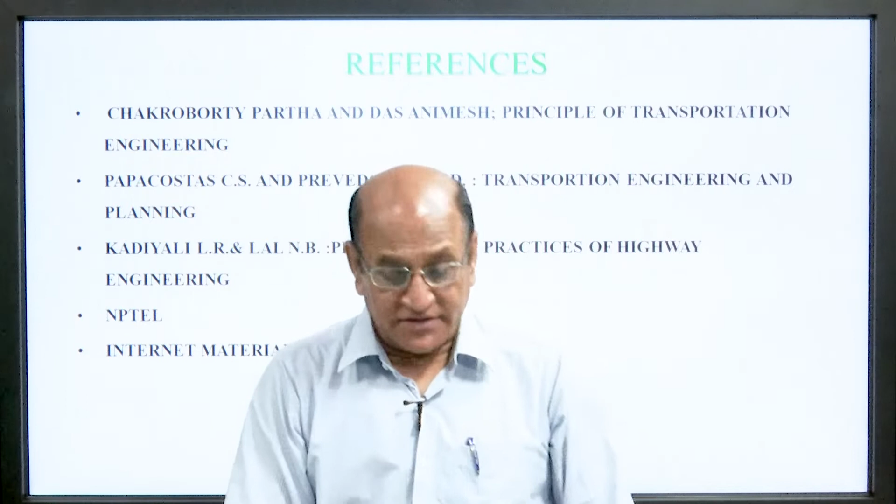The contents that I have taken are: transportation planning, component of transportation, travel forecast, transportation problem facing US cities, transportation problem, traffic management, long commute, parking issue, large fleet cost, a sprawling city.

Making public transportation attractive, bad traffic management, parking problem, fuel price, faulty planning and transport system, worn out and obsolete asset, improved technology.

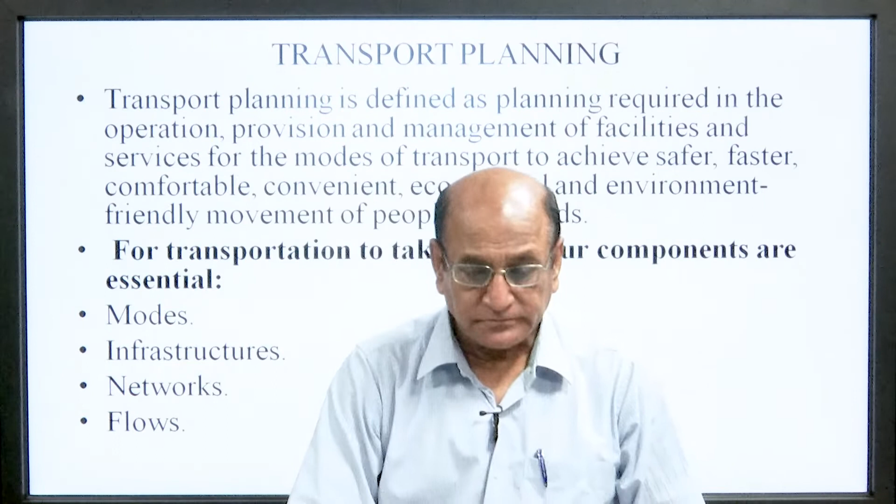Transportation planning is defined as the planning required in the operation, provision and management of facilities and services for the modes of transportation to achieve safer, faster, comfortable, convenient, economical and environmental friendly movement of people and goods.

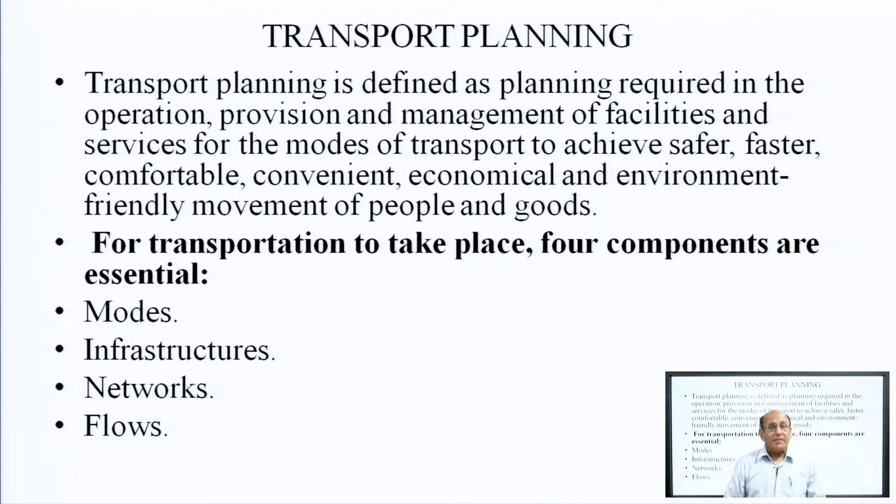For transportation to take place, four components are essential: modes, by which mode the passenger or goods are going; infrastructure, meaning road, bridge, metros, railway tracks, etc.; network, there should be a proper network; and flows, how traffic are flowing.

So components of transportation as given: the first is mode, in which aeroplane, then car, then rail, truck, etc. are shown here. Then infrastructure, that shows road, and networks, how roads are connected or different modes are connected with each other, and the flow, how the traffic flow is going on.

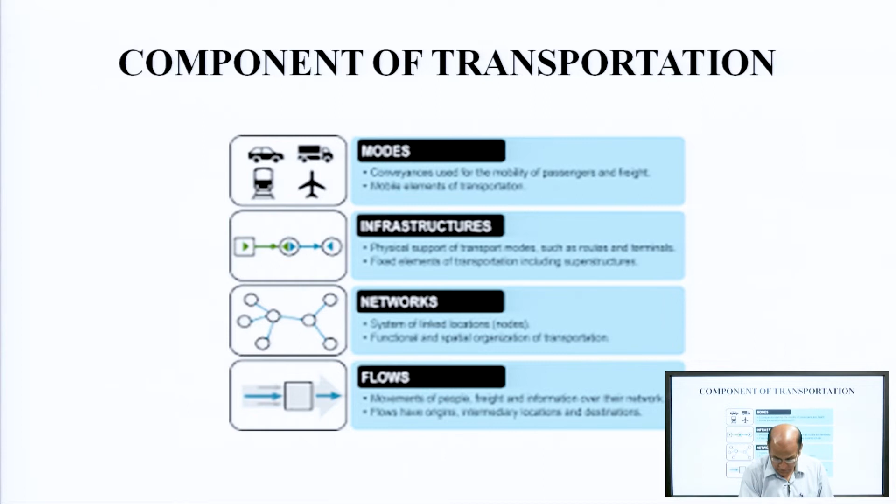Travel forecast. The 4-step travel model is a framework for determining transportation forecast, and those are trip generation, trip distribution, mode choice and route assignment.

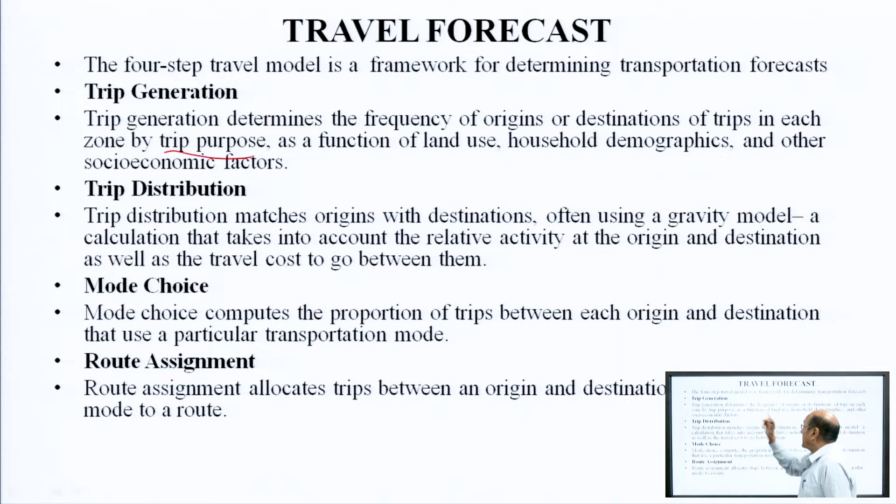So trip generation determines the frequency of origin and destination of the trip in each zone by trip purpose, as a function of land use, household, demography and other socio-economic factors.

Then the second step is trip distribution. Trip distribution matches origin with destination, often using a gravity model calculation that takes into account the relative activity at the origin and destination as well as the travel cost.

To go between them. Then the mode choice, by which mode the passenger or trip will be completed. The mode choice computes the proportion of trips between each origin and destination that use a particular transportation mode.

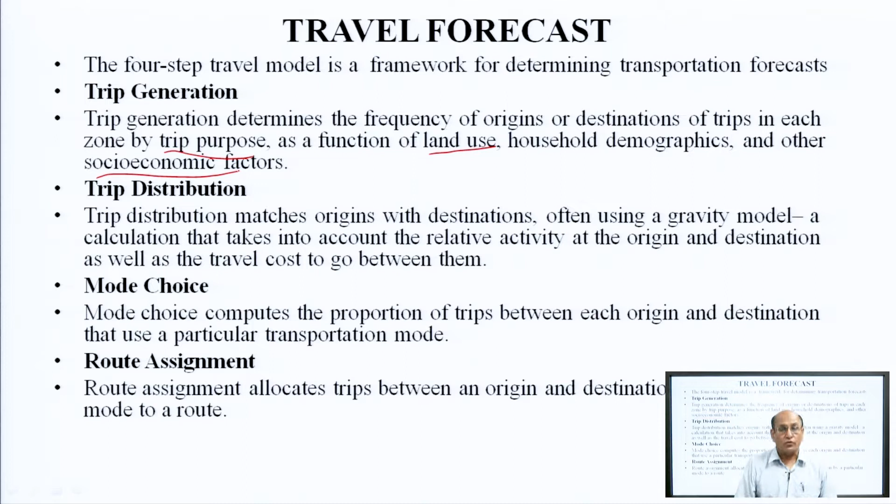Route assignment allocates trips between the origin and destination, by a particular mode, to a particular route. So this is a line diagram for the 4-step regional travel forecasting model.

You can see here, here is the highway and transit network. It is connected zone to zone. So each city is divided into different zones for the traffic or making trips.

Then it is connected based on the land use data, and after getting all these things, then the trip generation step will come into existence. The second is trip distribution.

As we think how a trip generates: suppose we have to purchase cloth, so we decide where to go, either Hazratganj, Aminabad, or some other place also - I have just given an example of Lucknow. So as we think, then the trip generation starts.

Then the trip distribution - here is the trip distribution in which trips are distributed to different sites. Then by which mode you will travel, that will be decided by the mode choice.

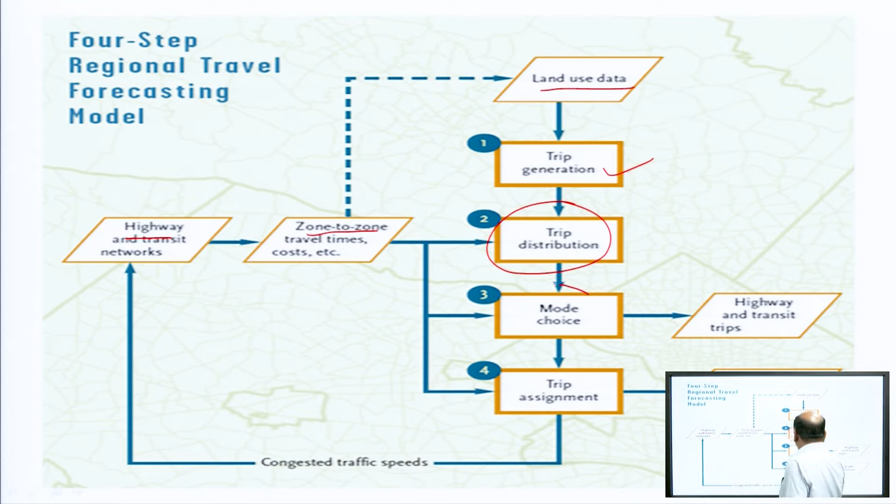And finally, after getting each and everything, then we decide a particular route, particular place with particular modes - the trip is assigned. So this is the highway and transit, and after getting all the things, then the traffic volume will come into existence.

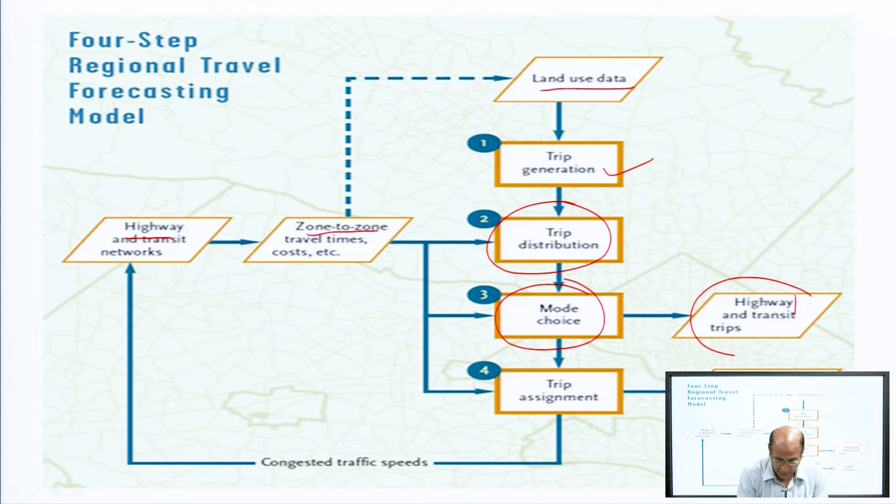So the objective of the transportation problem: transportation problem works in a way of minimizing the cost function, because everything is correlated with cost. So we can say everything is a function of cost, and our aim is to minimize the cost.

The cost function is the amount of money spent to a logistics provider for transporting a commodity from the production or supplier's place to the demand place. It includes the distance between two locations, the path followed, mode of transport, number of units transported, the speed of transport, etc.

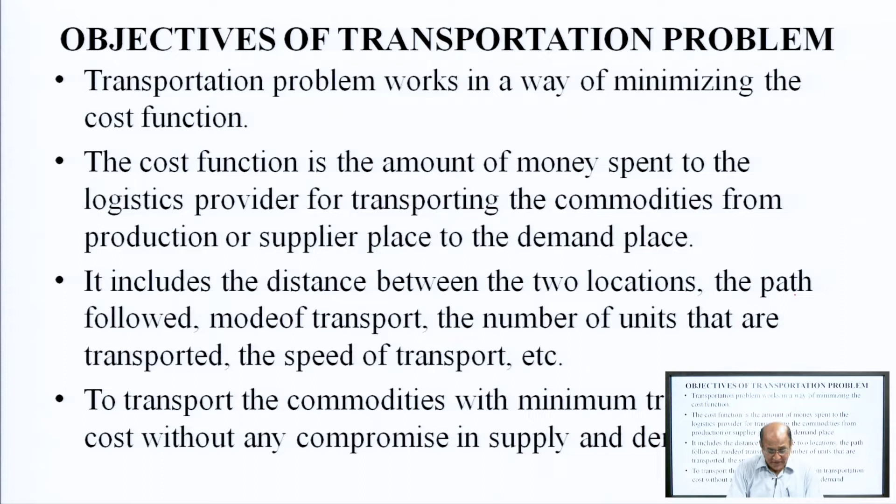To transport commodity with the minimum transportation cost without compromising supply and demand. So, transportation problems facing US cities are: first, traffic management, long commutes, parking issue, large fleet cost, a sprawling city.

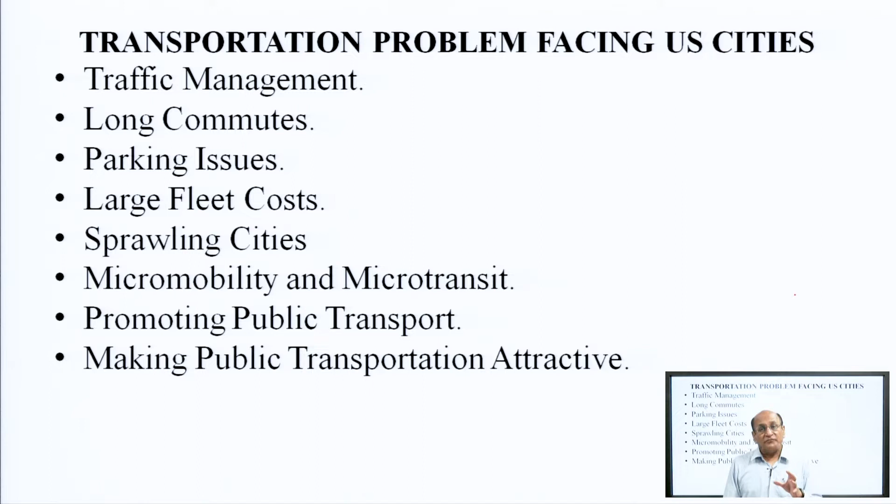Micro mobility and micro transit, promoting public transport, making public transport attractive. So these are the problems faced by different cities of the US.

So first we will discuss the transportation problem. The transportation problem is a special type of linear programming problem, where the objective is to minimize the cost of distributing a product from a number of sources to a number of destinations.

Transportation deals with the transportation of a commodity. It is assumed that the level of supply at each source and the amount of demand at each destination are known. The objective is to determine the amount to be shifted from each source to each destination such that the total transportation cost is minimum.

That could be calculated with different parameters.

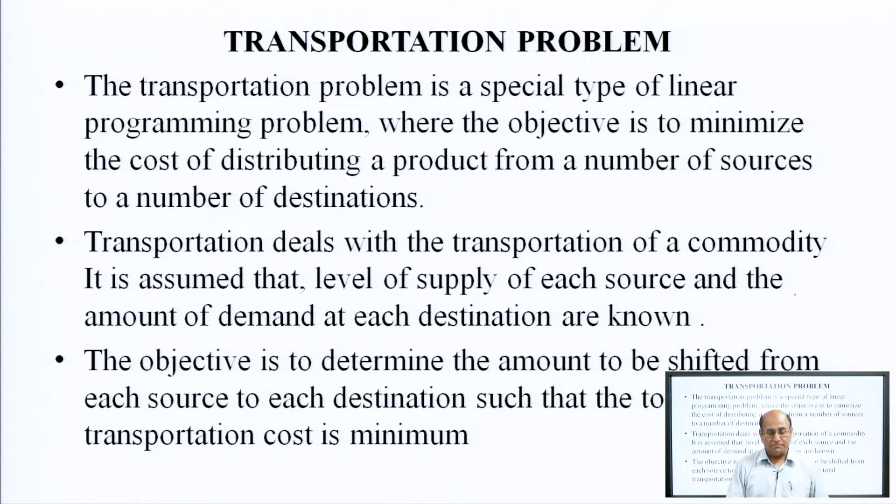Traffic management. Some have argued that the problem of traffic congestion is inevitable, as the Brookings Institution has pointed out that traffic jams happen because people are all trying to get to work and school at the same time. This is not necessarily a bad thing. Of course, having people work and learn together at the same time is probably a net good for our society. Unfortunately, it does lead to increased traffic.

Contrary to what many people believe, in cities, especially those with a more robust metropolitan population, traffic jams are probably avoidable. After all, some cities do better than others when it comes to traffic management.

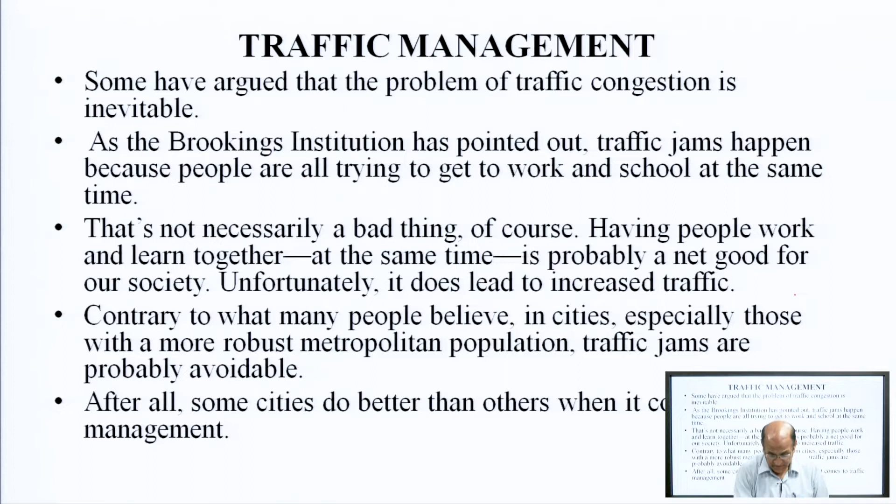Long commutes. Long commutes have socio-economic causes. Jobs tend to be clustered in cities. Workers need to live in relative proximity to their jobs. At the same time, the cost of living in most cities is exorbitant. This forces lower income earners to live far from the city center, creating inequalities for many communities that are already disproportionately marginalized.

Americans spend an average of 17 hours a year searching for parking. Parking problems do not just impact drivers, they also impact the economy. If drivers cannot park their car, they cannot go shopping, make it to appointments, or they may even miss their business meeting. This is an area that has frustrated local government and can even lead to increased air pollution as cars idle waiting for a parking spot.

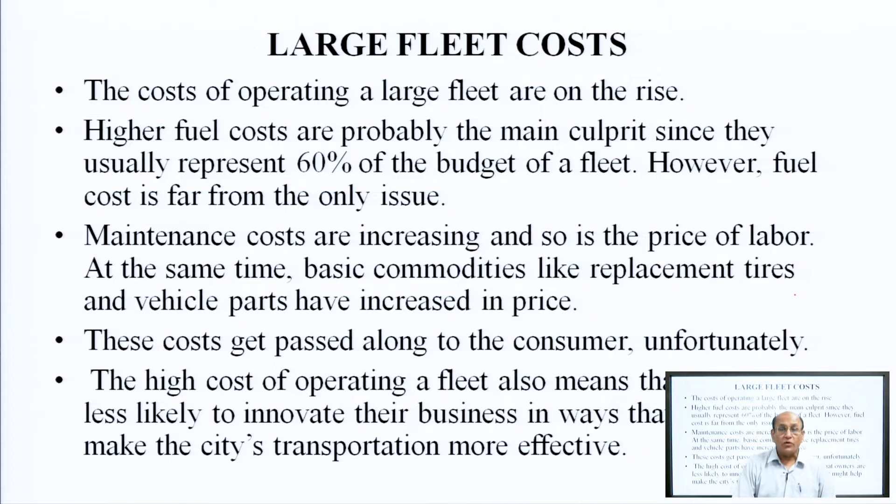Sprawling cities, expanding cities. American cities tend to grow outward from the center. Densely concentrated cities like Chicago and New York are exceptions rather than the rule. Urban sprawl is the norm. At the fascinating extreme end of this trend is the city of Yakutat, Alaska, which measures 9,500 square miles, but whose population is only 662 people.

The bigger a city gets, the longer it typically takes for its residents to get around. A sprawling city like Yakutat takes hours to drive across. Setting up an effective public transportation system in such a massive location presents serious challenges as well.

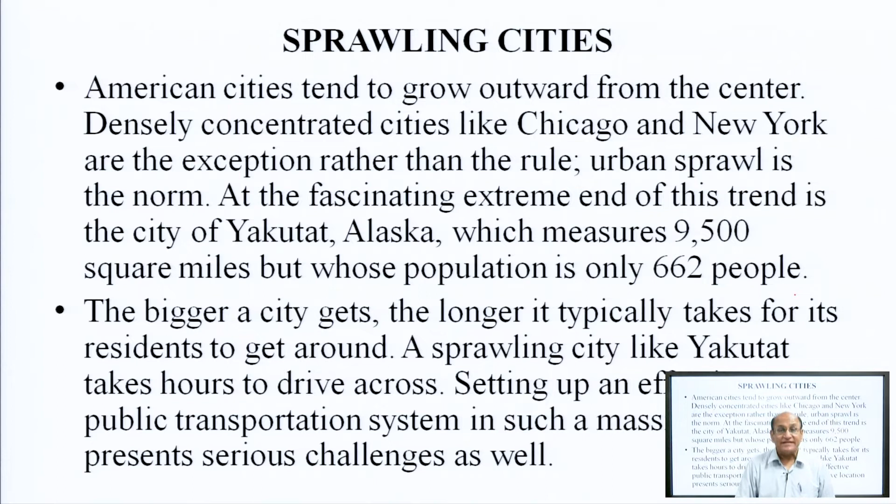Finding solutions. Micro mobility and micro transit can help solve problems like urban sprawl, especially in cases where the last mile and the first mile are not well served by the city transportation system. These are electric vehicles like scooters and e-bikes that can fill in the transport gap and take residents to and from a distant train station as needed.

Electric vehicles have far greater fuel efficiency than cars. They are also a cheap alternative to cars and trucks, and they do not damage air quality or clog up roadways or create a traffic jam.

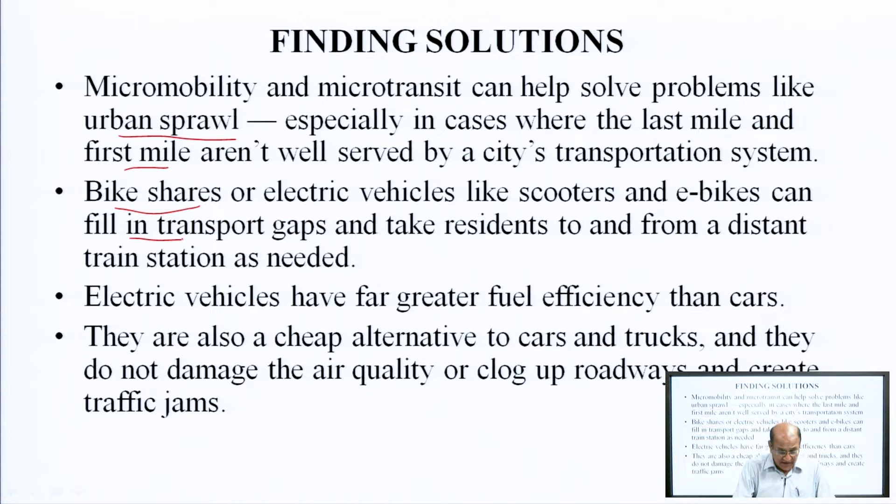Making public transportation attractive. A few years ago, a census asked Americans how they commute. More than 76% said that they drive to their workplace every day, and of those three out of four Americans who drive, 9% said they carpooled.

In some cases, this is a matter of choice. There is evidence that if a city makes public transportation more attractive, its residents will step away from their cars and take advantage of bikes, buses, trains and trolleys. This would solve many problems outlined in this article by reducing congestion and parking issues.

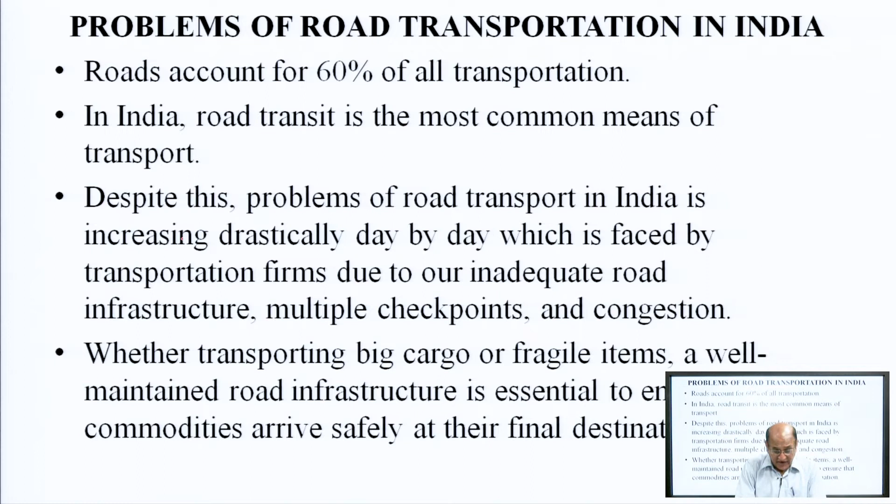Road transport accounts for 60% of all transportation. In India, road transit is the most common means of transportation. Despite this, the problem of road transport in India is increasing drastically day by day, faced by transportation firms due to inadequate road infrastructure, multiple checkpoints and congestion. Whether transporting big cargo or fragile items, well maintained road infrastructure is essential to ensure that cargo arrives safely at the final destination.

Problems of road transportation in India, and the solution. We've discussed a lot about the whole world, but now we can concentrate on the problems in India. So the solution: during rainy season, most roads are unsafe to travel on. According to surveys, transportation businesses spend roughly 200 crore per year on vehicle wear and tear. It is a very big amount, 200 crore per year. The cause for this could be due to poor road conditions.

Maintaining a strong road infrastructure could be the best solution to the problem of road transport in India. In order to build a long lasting road, long lasting material should be used.

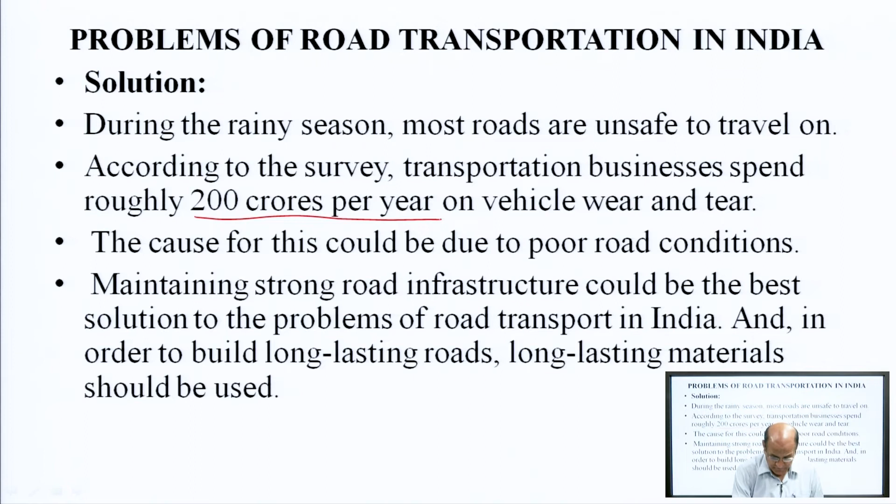Bad traffic management: according to a traffic report, India is the most populated country and has a plethora of traffic problems and solutions. Due to the growing population of cities, freight vehicles and travelers alike must spend a significant amount of time stuck in traffic. This is a big problem for all cities in India, and one of the major problems in the transportation system of India, which has no exact answer.

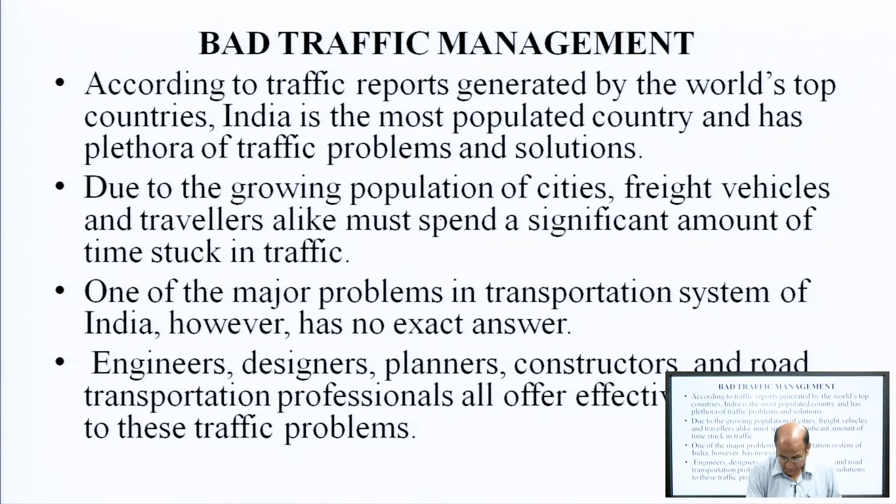Engineers, designers, planners, construction contractors and road transportation professionals all offer effective solutions to these traffic problems, and government is now thinking about these things. The solution: one of the most widely recognized techniques to determine vehicular traffic in small and medium towns is to develop new routes and side steps to redirect the traffic. Street traffic can be reduced by rearranging the traffic management framework, presenting a new traffic stream and direction without making any major structural change to the current street, which might give temporary relief.

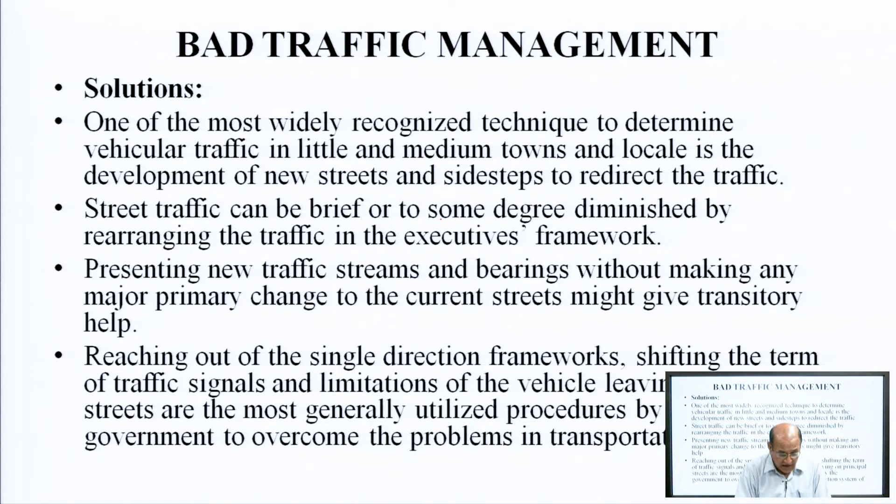Parking problem: parking is one of the major problems in the transportation system in India, as there is not enough space in the center of a large city to accommodate everyone who wants to drive and park. As a result, parking must be controlled. However, fines in certain towns are minimal, so that getting caught two or three times is less expensive than paying parking fees.

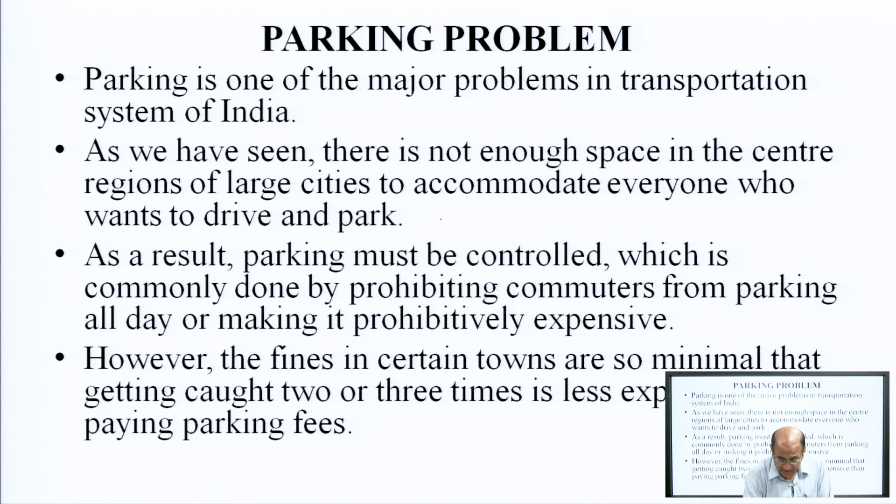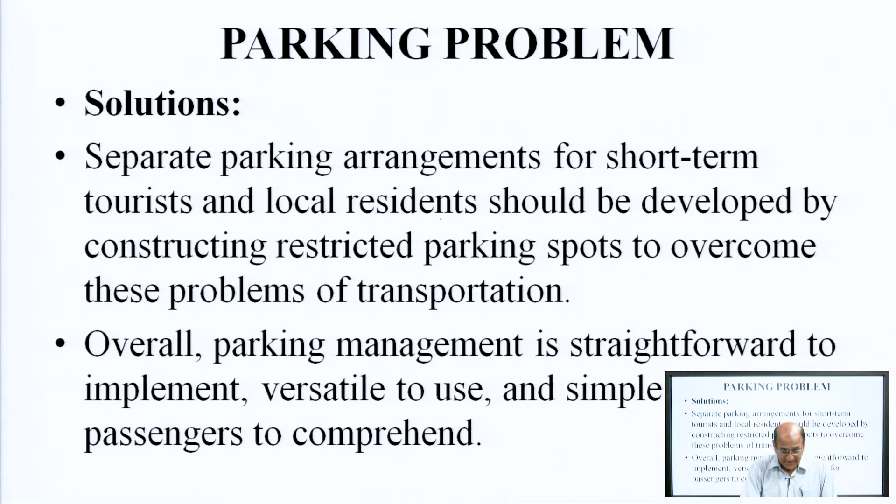The parking problem solution: separate parking arrangements for short term use. Restricted parking spots should be developed for tourists and local residents to overcome this problem of transportation. Overall, this parking management approach is straightforward to implement, versatile to use, and simple for passengers to comprehend.

Fuel price is a major problem. One of the highly faced problems in transportation in India is the rising oil cost, with Indian Oil Marketing Corporation intending to raise fuel prices. Car owners may be forced to make some difficult financial decisions.

The solution will be electric vehicles. These electric automobiles are now very good in the sense of innovation. Electric vehicles now coming into the market do not require fuel and can be recharged on a regular basis at various electric stations and outlets.

Make more use of public transportation, as we have discussed a lot earlier. Also, local governments in a number of cities are progressively favoring CNG vehicles over diesel and petrol cars, since CNG is less polluting than carbon based fuels like gasoline and diesel. Cycling and walking, of course, are also very good for health and for traffic.

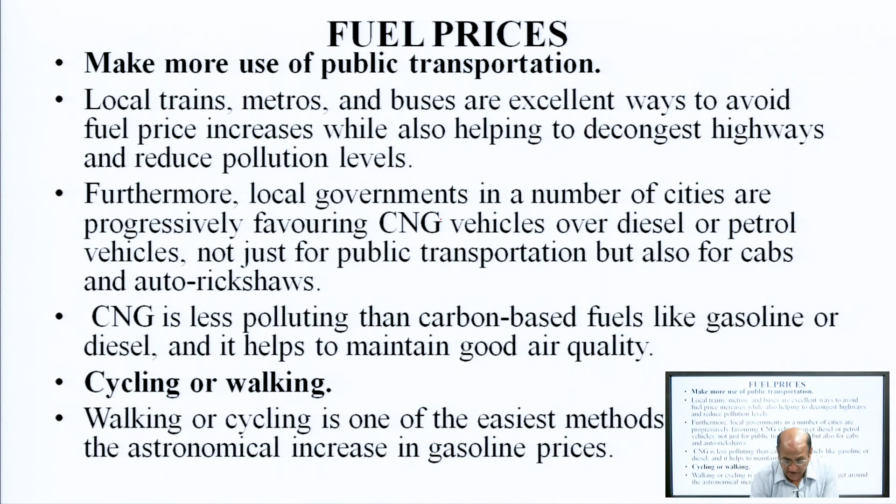Faulty planning and transportation system: the development of the transport system is unbalanced, and there is heavy pressure on rail and road transport in certain cities and regions. For balanced development of the region, alternative routes should be developed, like the metro in Delhi, which has decreased the pressure on road transport.

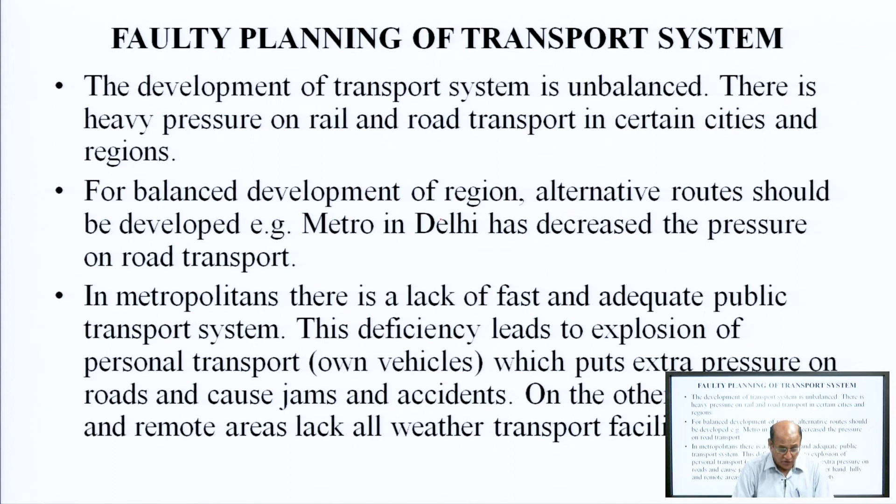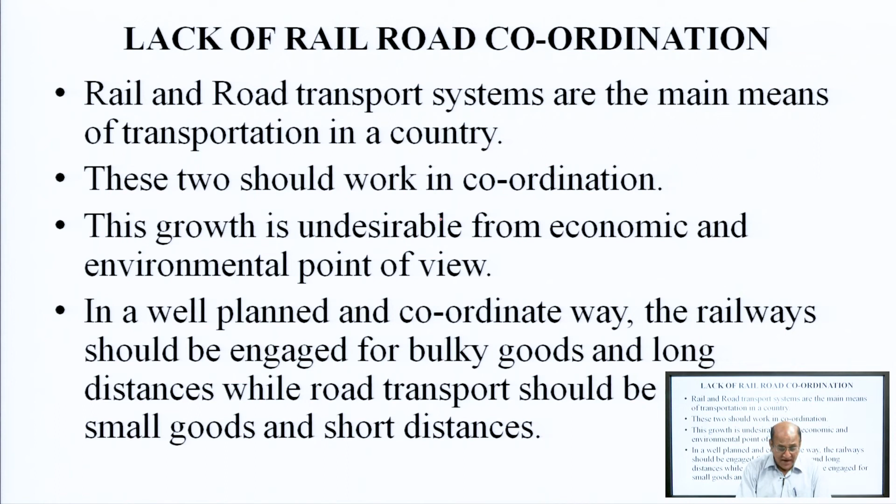Lack of rail-road coordination: rail and road transport systems are the main means of transportation in our country. These two should work in coordination, and uncoordinated growth is undesirable from the economic and environmental point of view.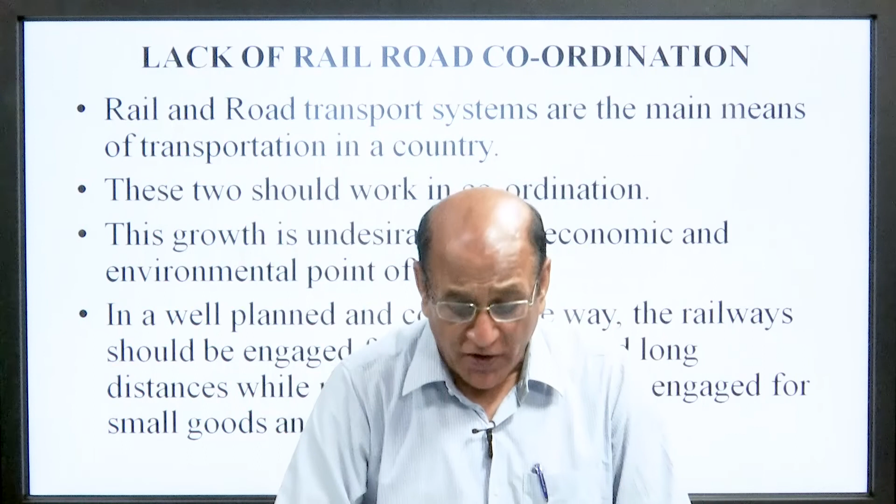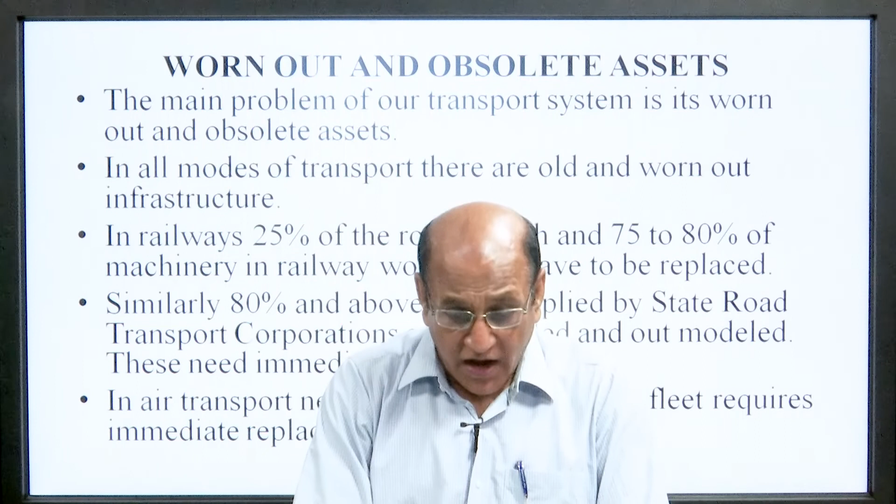Worn out and obsolete assets: the main problem of the transportation system is its worn out and obsolete assets. In all modes of transportation, the assets are old and worn out. In Indian Railways, 25% of route length and 75 to 80% of the machinery in railway workshops have to be replaced. Similarly, 80% of the buses operated by the State Road Transport Corporation are outdated and outmoded.

Improved technology: in rail and road transport systems, we are using age old technology, so our progress is slow. Our road construction is substandard, which increases wear and tear of vehicles and overhead expenditure.

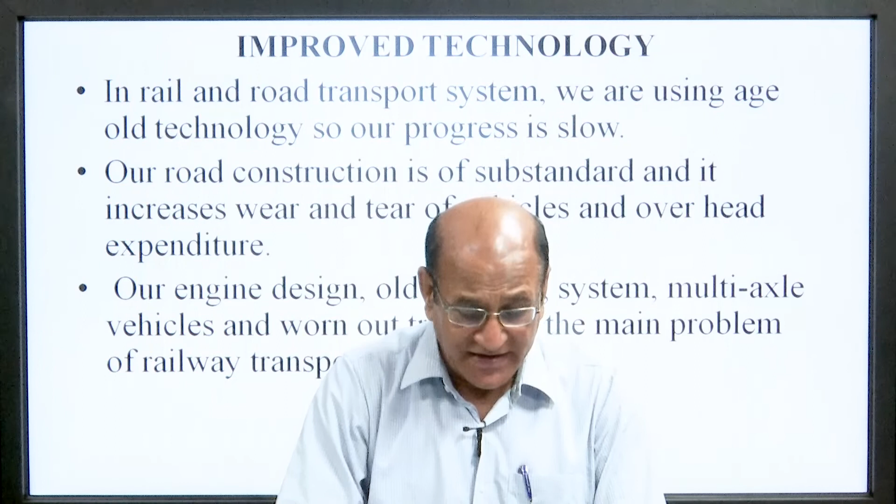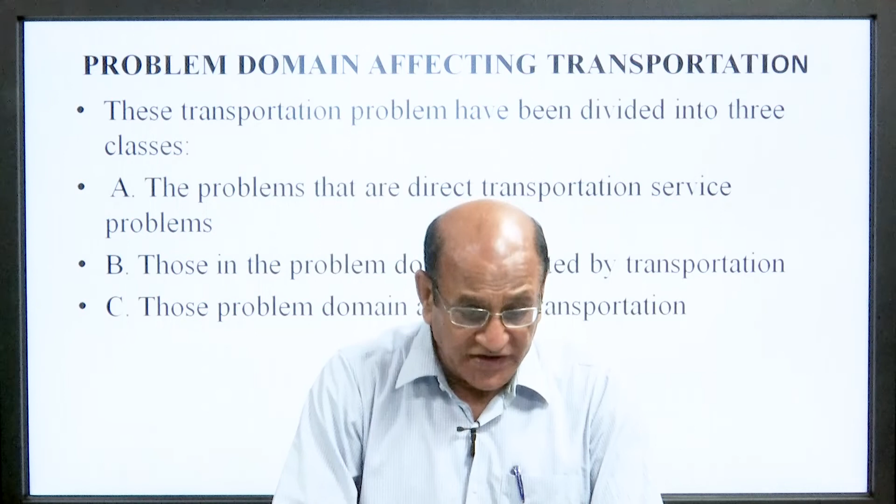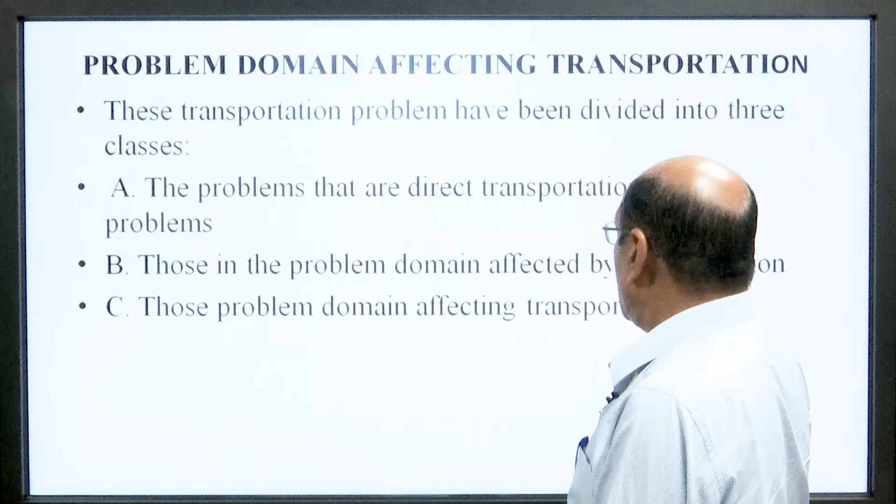Problem domains affecting transportation: the transportation problem has been divided into three classes: problems that are direct transportation services, problems in the domain affected by transportation, and problems in the domain affecting transportation. The first, transportation service based problems, are congestion, inadequate capacity, high user cost, high facility cost, low rate of return, lack of safety, lack of privacy and discomfort. These are the service problems.

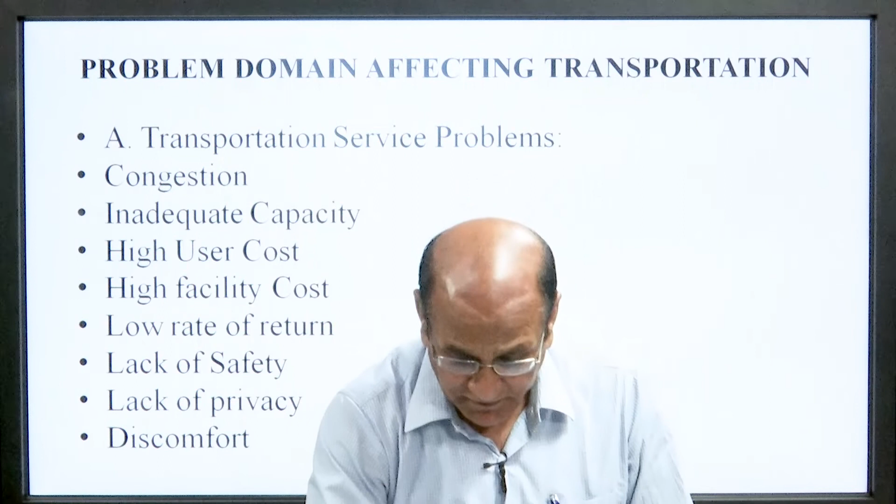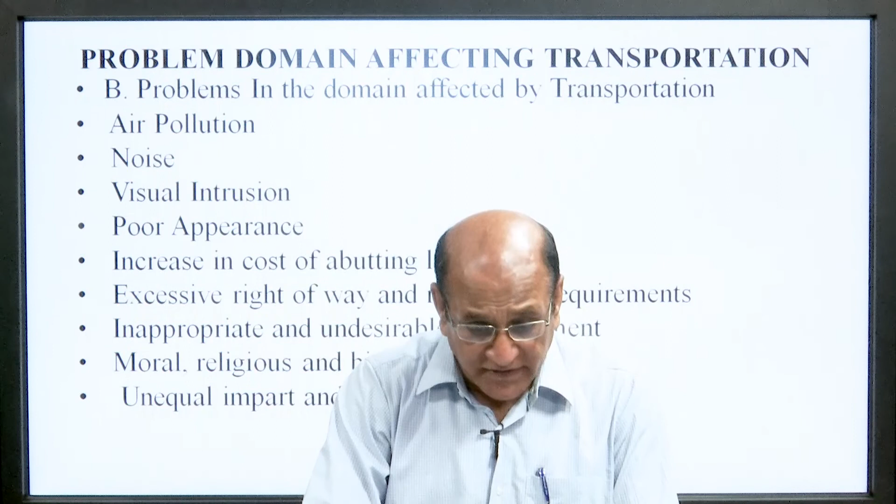The second is the domain affected by transportation, which includes air pollution, noise, visual intrusion, poor appearance, increased cost of abutting land, excessive right of way and relocation requirements, inappropriate and undesirable development, moral, religious and historical problems, and unequal impacts on certain population groups.

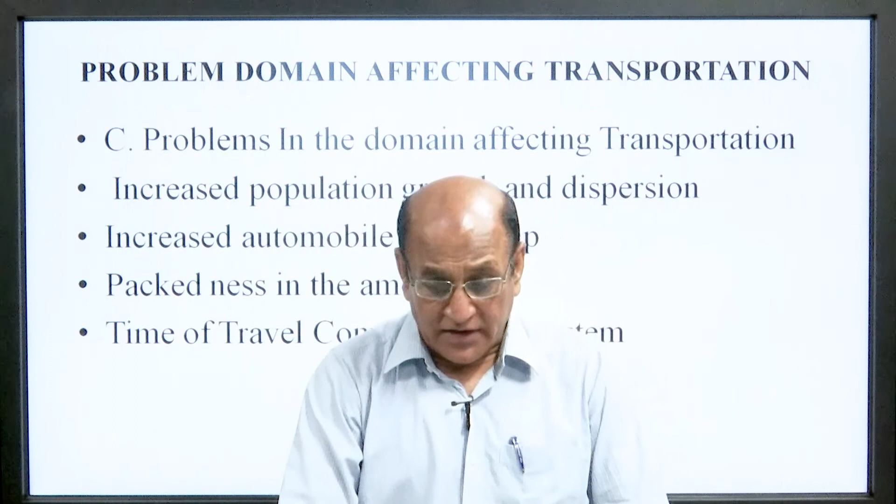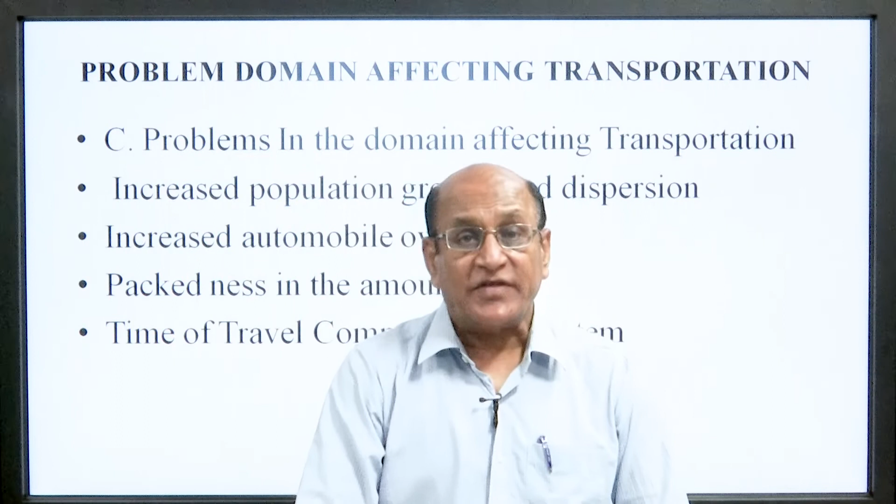The third is the domain affecting transportation: increased population growth and dispersal, increased automobile ownership, and crowdedness in the amount, time, and travel components of the system. So these are the problems that we have already discussed. Thank you very much, thank you.